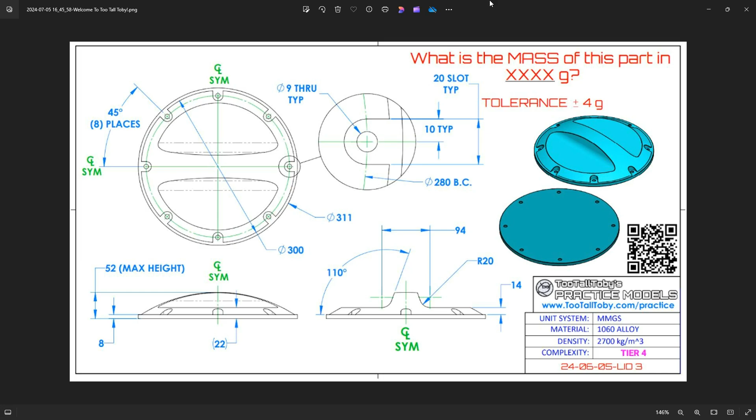So we'll go ahead and build this in IronCAD and show you some of the cool ways to build this. We're in millimeter units, so we're just going to drag and drop a cylinder to start off with. This is our original shape, our base, which has a diameter of 311 and a height of 8 millimeters. So we'll go ahead and build that as our starting point.

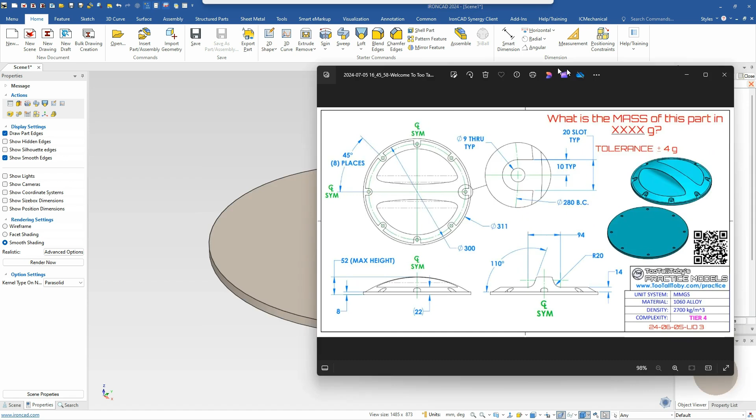Now the next one is this cap. So how do we do the cap inside of here? An interesting thing - let me pull that back - it gives a height distance value of 52 from here, so we're going to subtract that. But basically, how do we get this cap without doing a spin shape?

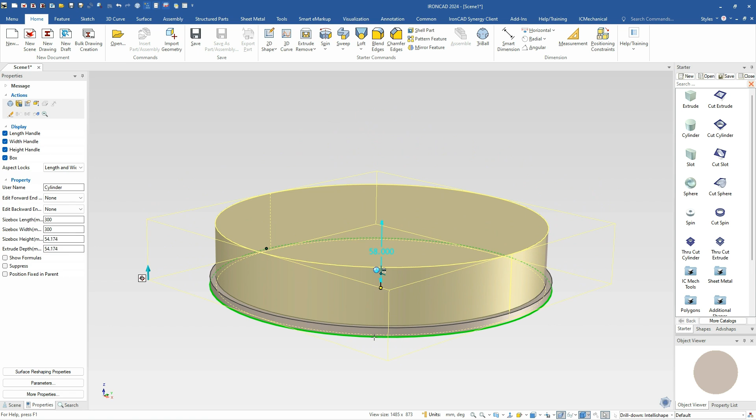The way to do that is to use another cylinder because it's also on a different radius. We're going to drag and drop that right on the center point, and we're going to put a 300 millimeter diameter on that. Now, to get the height value, I'm going to snap this down to the bottom, and snap this in line exactly to this.

The reason is we have these surface reshaping properties, which you can access by right-clicking, or from our property browser. We have information defining our start and end sections of our geometry. This arrow is defining that on extrude, so our start would be the bottom part of that arrow, the end would be that top. So we want the end section, and we want to add a cap to that.

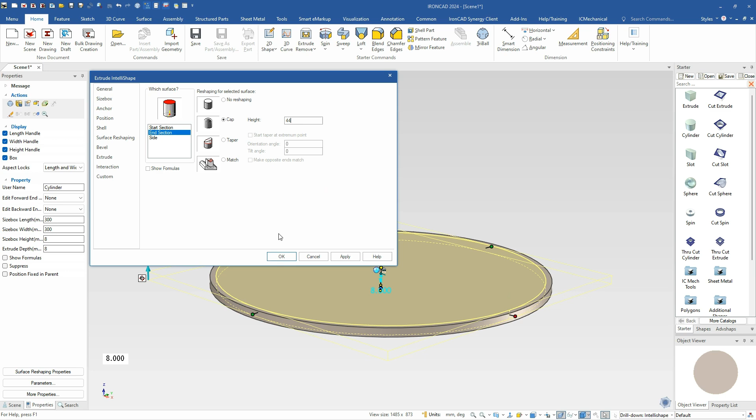We know the overall height is 52, and we just got to subtract the 8, so it gives us a value of 44 for the total height. Basically it's going to take this shape on the end and add that 44 cap on that. If we go ahead and hit OK, you can see it gives us that nice dome shape without doing any spin shape whatsoever. So it's a really handy feature inside of IronCAD to use those caps on the geometry.

So that's a kind of a cool feature. And you also have handle access - if you hit the tab key, you can access the handle to pull it up and down and move it in different locations other than the center if you needed to. But in our case, we got it right where we want it.

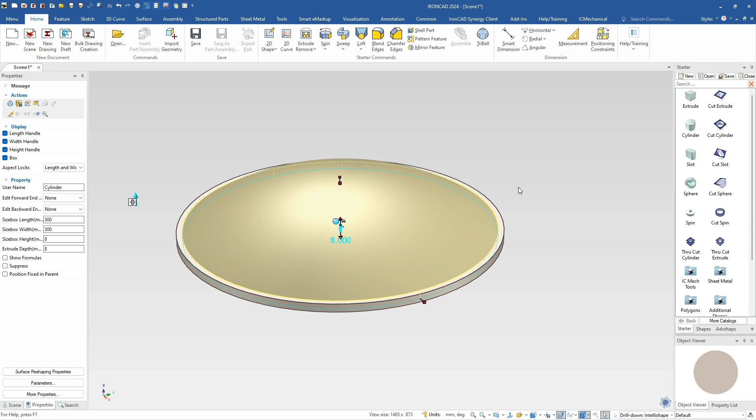Now let's go on to our next shape, which is this cutout on here. Let's go ahead and drag an extrude cut, and I'm going to hit the center point geometry here. What I'm going to do is just pull this up, or I can flip it - I guess probably just flip it. Let's do a flip extrusion on that.

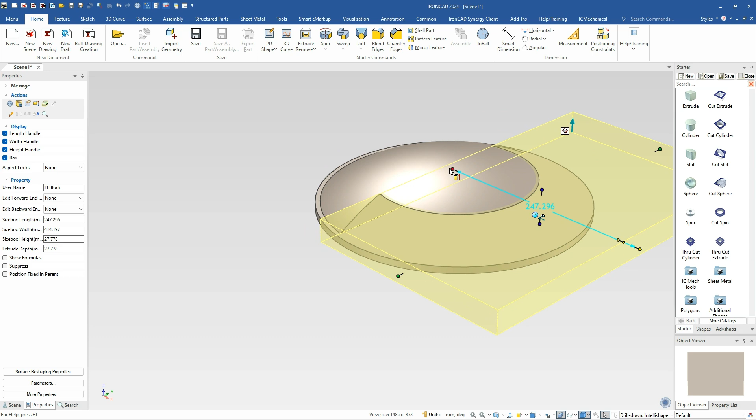So we've got that extrude there. We're going to pull it all the way through and out this way. I'm just going to modify this side a little bit - probably somewhere over here, doesn't really matter. We'll just position that in a second.

So we have that geometry of the cutout, and it has a 14 millimeter height here. We know we aligned it on that top edge, so we can just take this value, whatever it is, and move it with our arrow key to the end and say minus 14, which is basically offsetting it up 14 millimeters. So now we've got our height value inside of there.

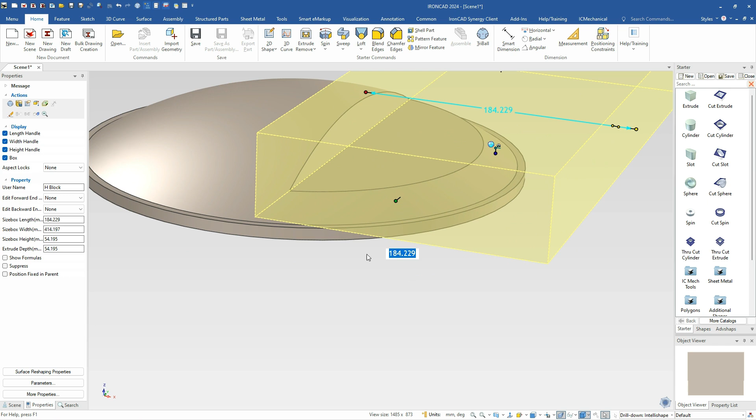Now we can go ahead and add some of our other geometry. One is this draft. The next thing we can do is go into our Feature ribbon bar, go to our draft faces, and we're going to draft it - it actually drafts from this face here. So we can pick that plane as our drafting face, select this face here, and we want to do that 20 degrees. So it's 110 - it's 90 plus 20 to get that 110 value. So we'll just go ahead and do that.

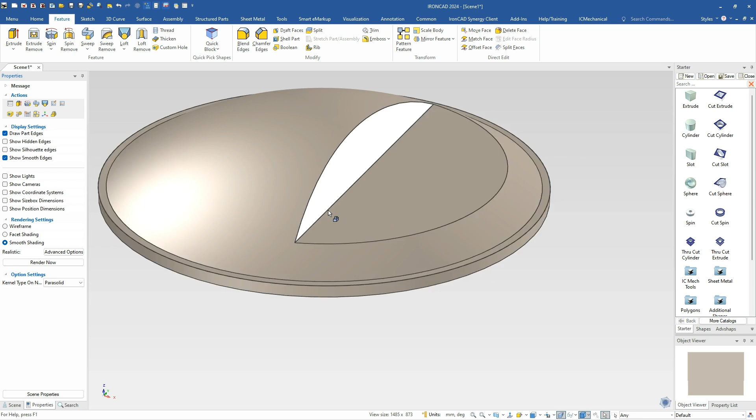Last, we'll go ahead and add a blend right along this edge, which has a value in this case of 20 millimeters, and just hit enter to apply that. So now, oops, we got our shape here. Let me go ahead and turn my edges back on, sorry.

Oh, I turned them off on accident in our rendering, so let's turn our part edges back on here. I hit that with a shortcut key, sorry about that. There we go, now we can see that.

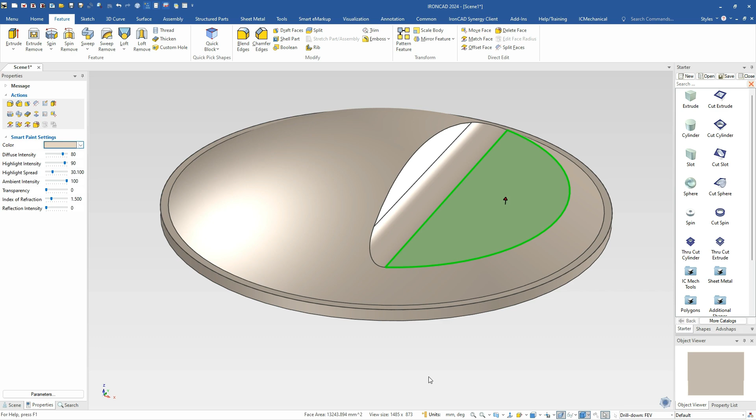Now that we've got this shape, we know this has to be offset half of 94 from the center point of this shape. So we can access this feature and move it with the triball. We turn on our triball, hold the shift key down, and snap to the center of this—doesn't matter where, we just want it along that center point.

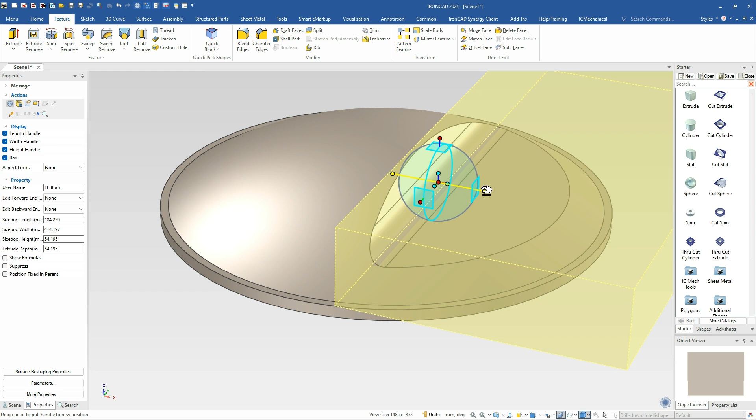Holding the shift key, we can hit a circular edge and it'll give us that center point. Now we lock down that handle and say give me the distance from the center point of this shape, which needs to be 94 divided by 2, so 47. Hit OK and that moves us that distance. Right click, edit distance from here, should be 47.

Now that we've got that in the exact position, we can do a pattern on this. We could do a mirror shape if we put a plane here, but we're just going to do a rotational pattern instead. We select this shape and do a circular pattern.

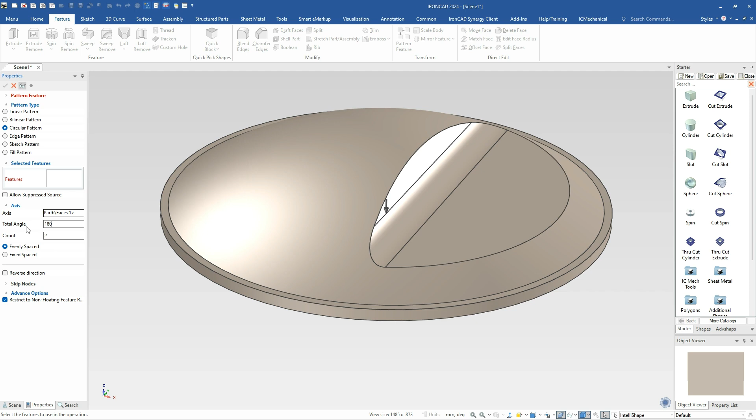We select our axis and do an evenly spaced pattern—we just need 2 of these, 180 degrees. We select our features, which will include all these features here: our blend, our draft, and our H block.

So we're going to create that—you can see it appearing on the other side. We hit OK to get that. Just to show our values, if we go back to home, we get our smart dimension, holding the shift key down, we get that center point.

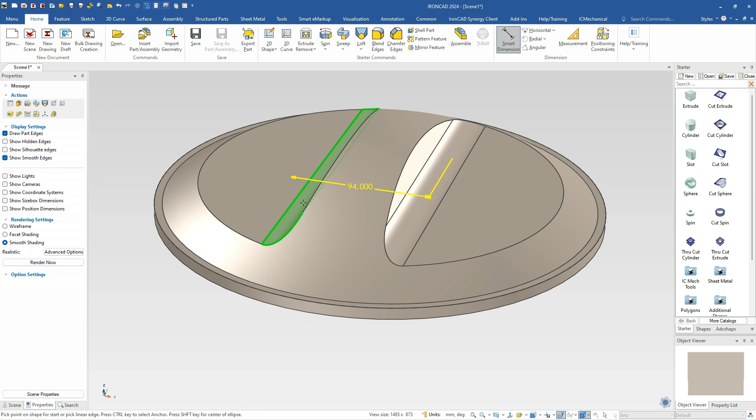We move over to this center point, still holding the shift key down, and it'll give us that 94 distance that we wanted. So a very easy way to place and position that shape.

Now we've got our grooves done. Last we need to do is these little cutouts here. I'm going to start this off with just a cylinder, dropping it right on this edge—actually let's try a different approach here, so let's delete this.

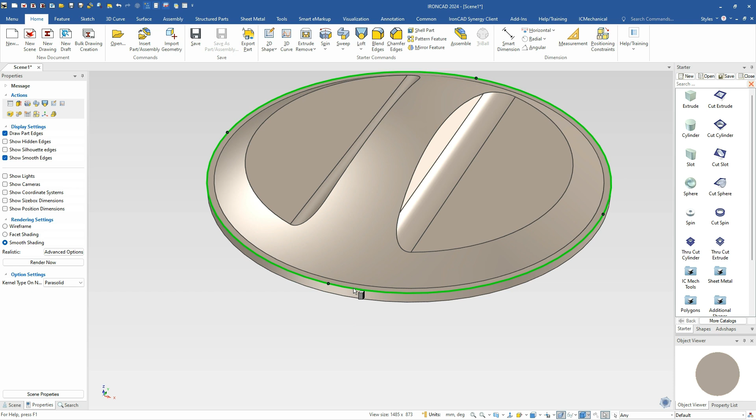I'm going to hold the shift key down and drop right on the center of this guy, which puts me right in the center. The reason is this needs to be on a diameter circle that's 280 divided by 2. If we hit that at 140 to put it in the right location, it's got a diameter of 20, and we can pull this up and snap to this bottom edge.

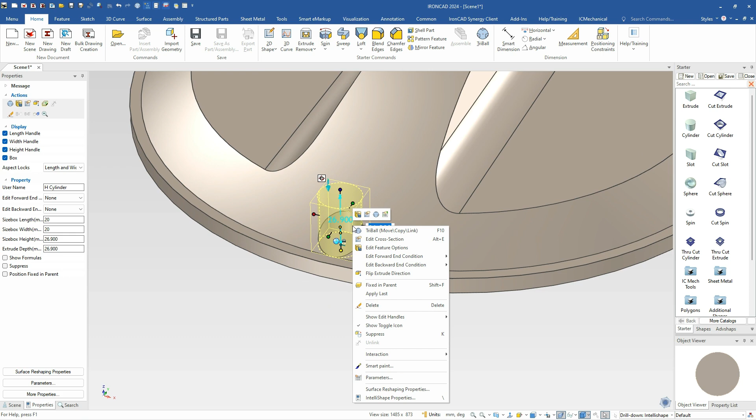That gives us our location for this. Since it's got a straight cutout, we can edit the cross section and essentially just draw a rectangle, referencing this point and drawing up some distance—doesn't really matter. If we right click, we can type in that value with a 20 width on the inside. Last, we trim out the geometry we don't need to give us our U shape essentially.

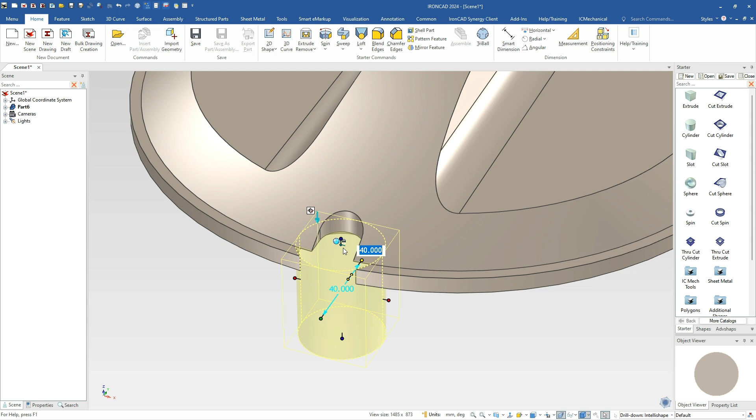So now we've got our cutout there. We can drop a cylinder right onto that center point, which has a diameter—let me check—9 millimeters. Okay, now we'll do that same pattern tool, the pattern feature again.

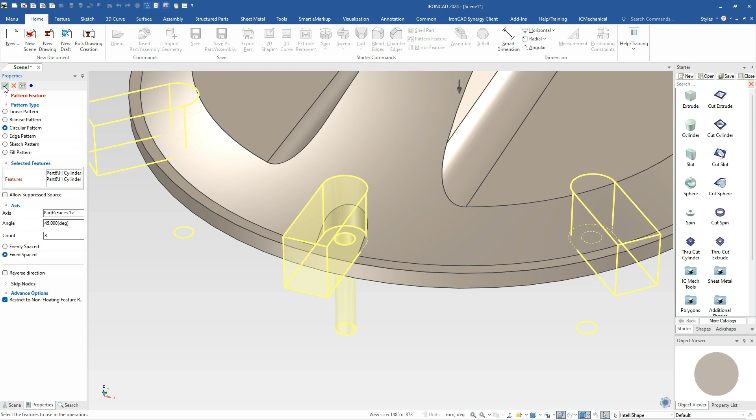We're going to do a circular pattern here, and this is still our axis that we're going to spin around. We'll do a fixed space, 45 degrees, and we have 8 of those. We select our notch and our hole as the features for the pattern, and go ahead and hit OK, which creates our pattern shape for us.

So that's essentially all it takes to build that model. It's a really nice thing to have that cap feature, and we can use the triball to position things easily in reference. Since we don't use any datum planes in this model, we don't have to—we can create it without any of that using the triball.

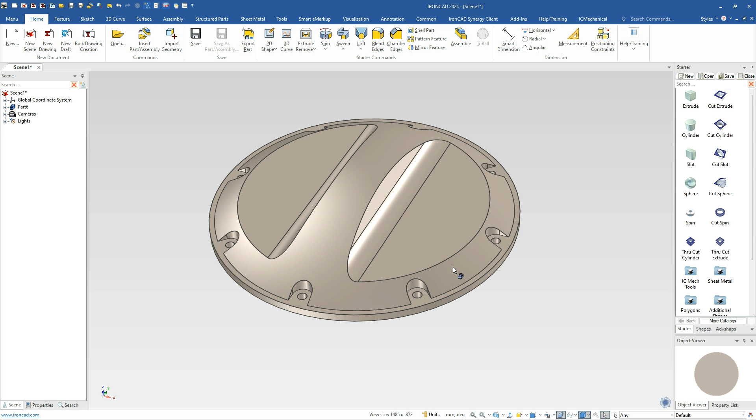Of course, we can use datum planes if you like, just like in other systems—put a datum plane, do mirror shapes, things like that. It's all possible to do in IronCAD, just showing you a different way to build this. And of course, this one has a mass density in this case of 2700. If we type that over, that should be 4677 for that model.

Again, you can add your Smart Paint colors to this to match the drawing, but that's all it takes. Hopefully you enjoyed this, and we'll see you on the next one.